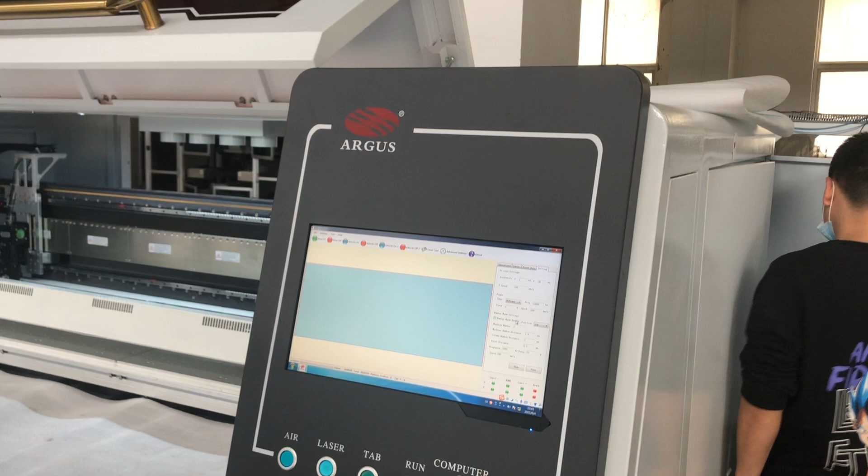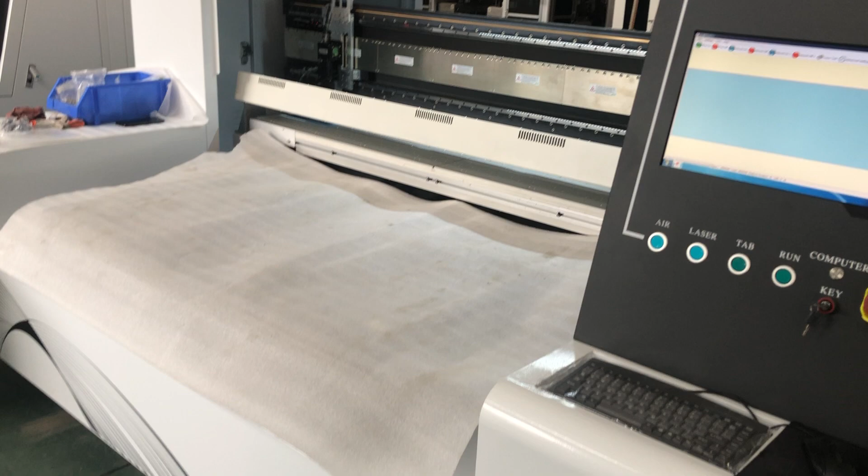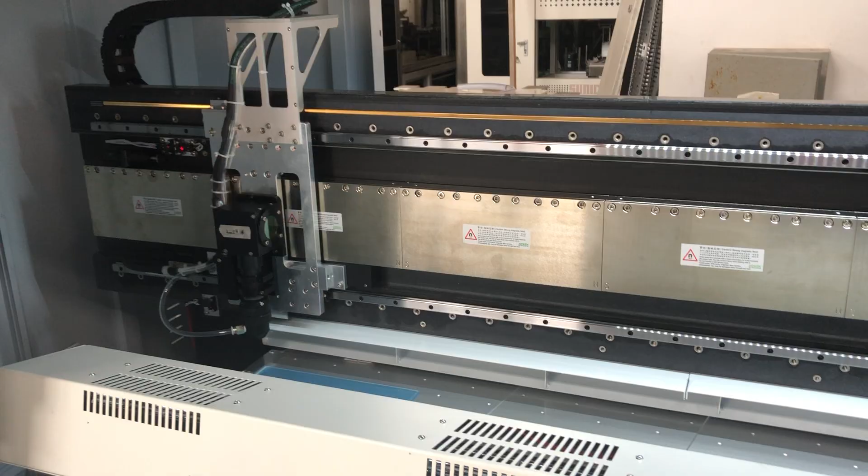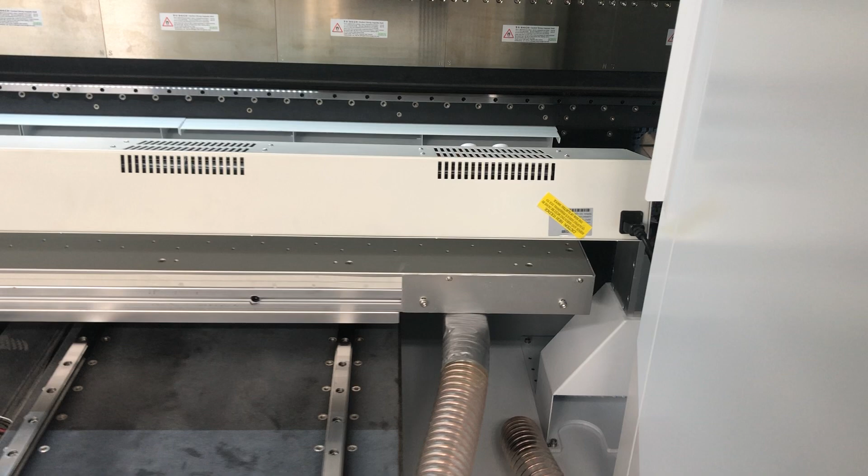Right now, we are just showing you our TV LGP laser dotting machine. This model is 1.2 meters by 1.9 meters. The host machine comes with the linear motor. And this one is the blowing system with the electric, so in case dust remains on the sheet when you do the dotting. In front, you can see it's connecting with the exhausting system.

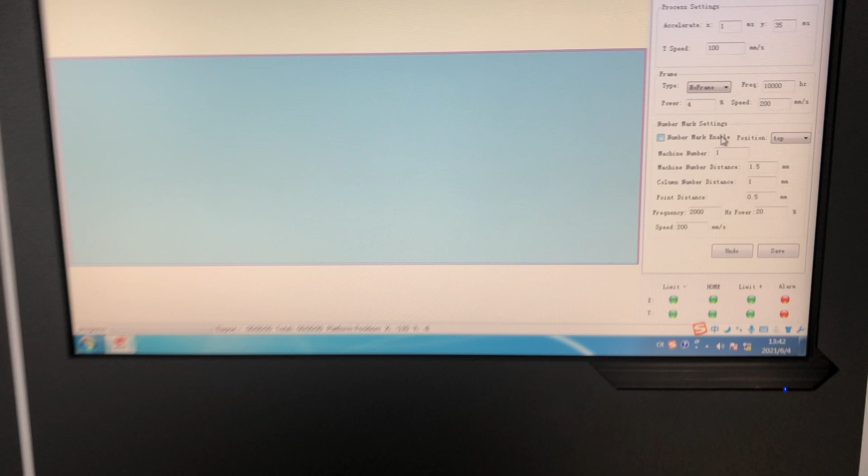Okay, now today we are going to introduce the software interface. Right now you can see here is our Sign Laser Point software. It is specialized for the LGP dotting.

On the top side you can see here, this is mainly the function items for the mechanical part. For example, blow on/blow off is used to control the blowing system, and adsorb on/adsorb off is used to control the work table, so you can have absorption power. So when you put on the sheet, it can be fixed on the work table and not moving.

This is laser testing advanced setting. Advanced setting is for the professional engineer to do the original system settings, so usually you will not need to use that.

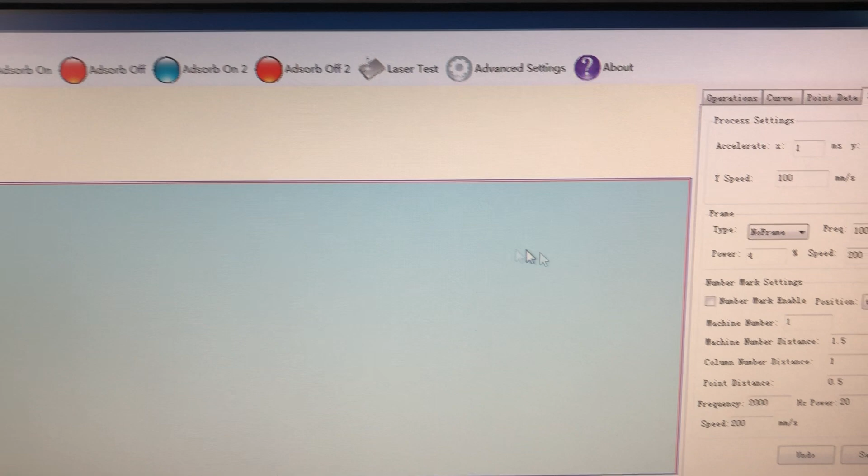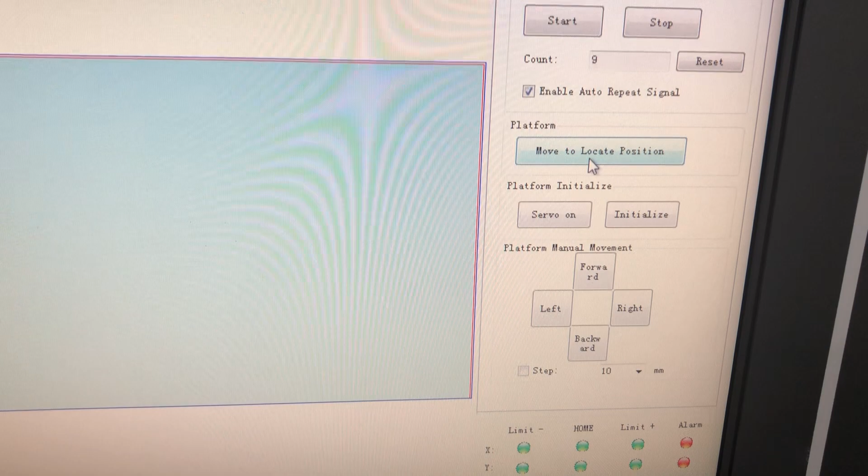For normal working, we will just concentrate here. You can see you have three operations: curve, point data - mainly concentrating in these three places. The operation is used to control the process, for example process start, stop, platform - just the work table. Move to location, locate position means when you click it, it will go to the original point.

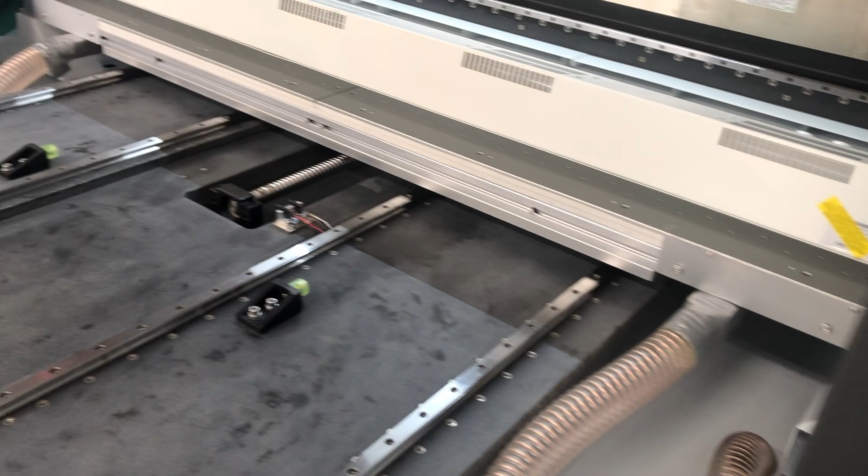Okay, the servo on initialize is used to give power to the work table. Forward, back, down, left, right - used to control the work table, go inside and come out, and also control the laser head left and right.

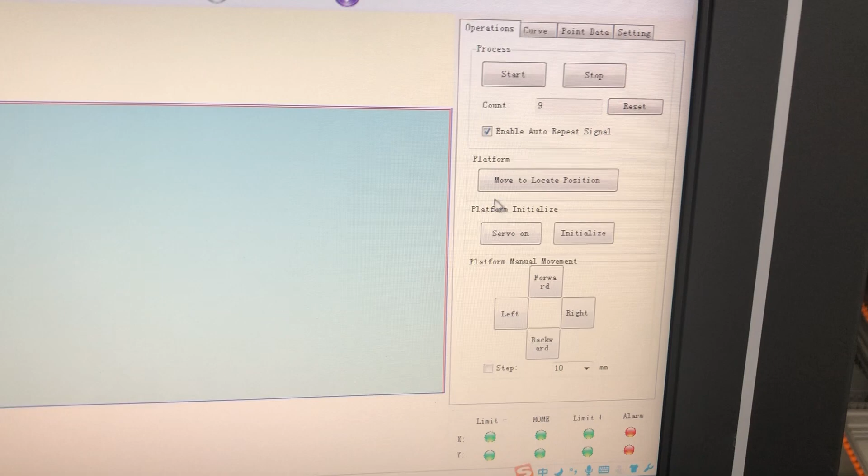There you have some signal lines to show you the status. This first page is used to control the laser dotting machine. And for the second page, the curve.

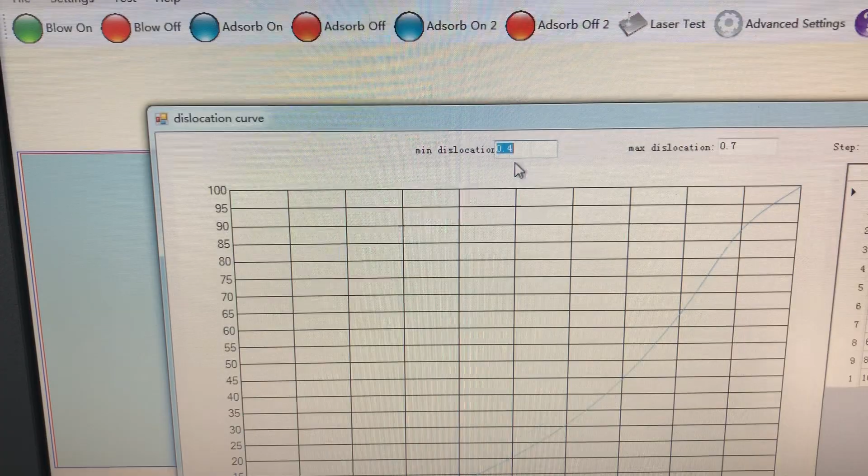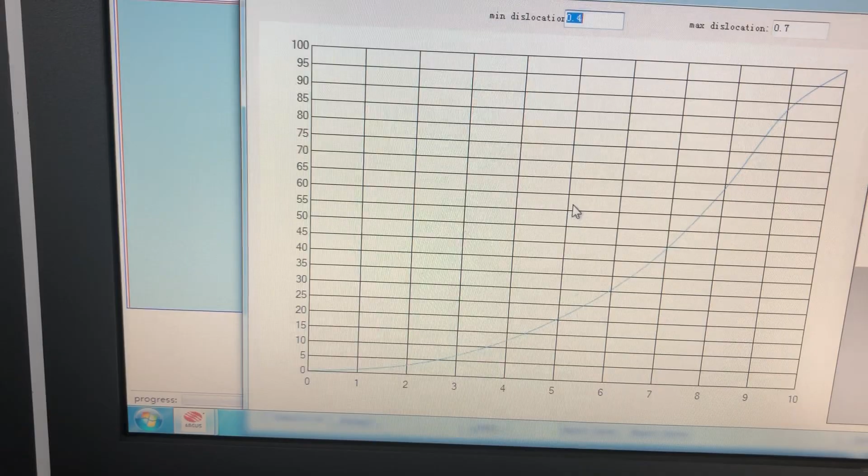Here you will see there's a dislocation curve edit. It's used to control and set the second line's dots, the dislocation place compared with the first line. So we can set here the minimum dislocation, maximum dislocation. This dislocation curve is usually to make the dotting patterns more beautiful, but it will not affect the result - it just affects the outlook of the LGP sheet.

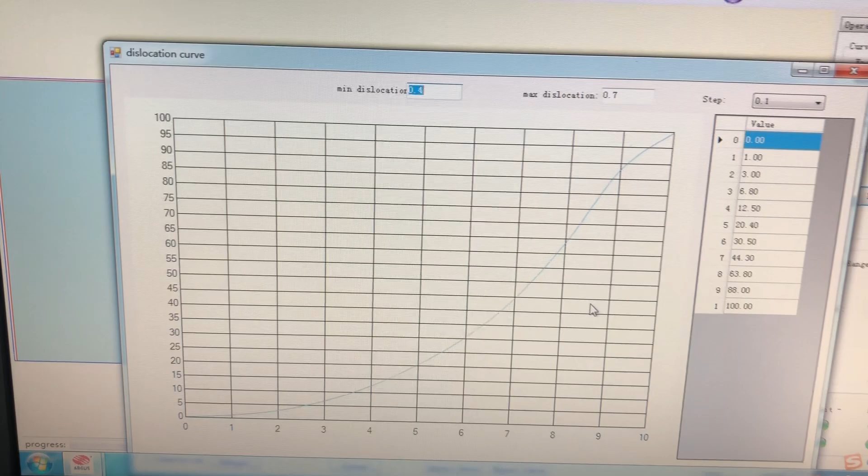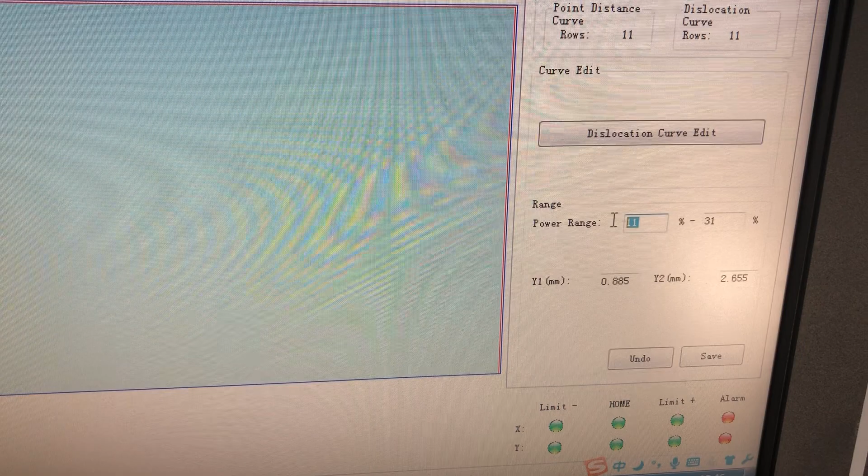Here we have the power range. We can set the minimum power, the maximum power. If you have more power, the dots will be bigger. If the power is small, the dots will be smaller. So more power means bigger dots, and then the density of the dots will be bigger. Low power, smaller dots, the density will be smaller. So we can use the power to control the density.

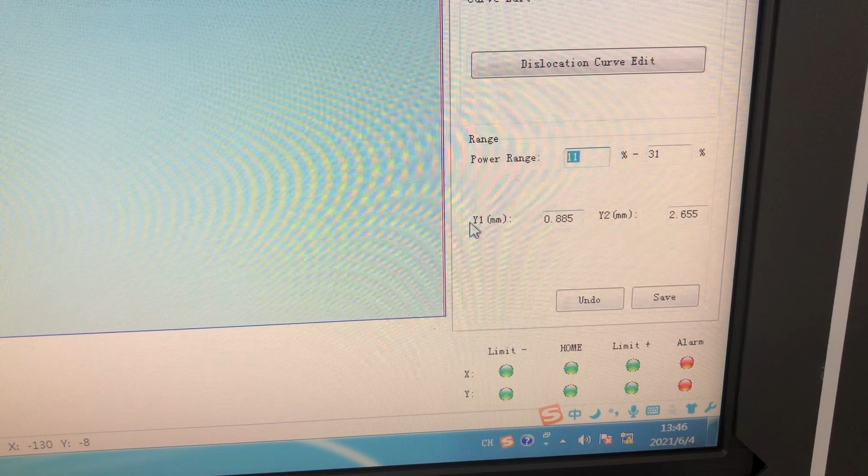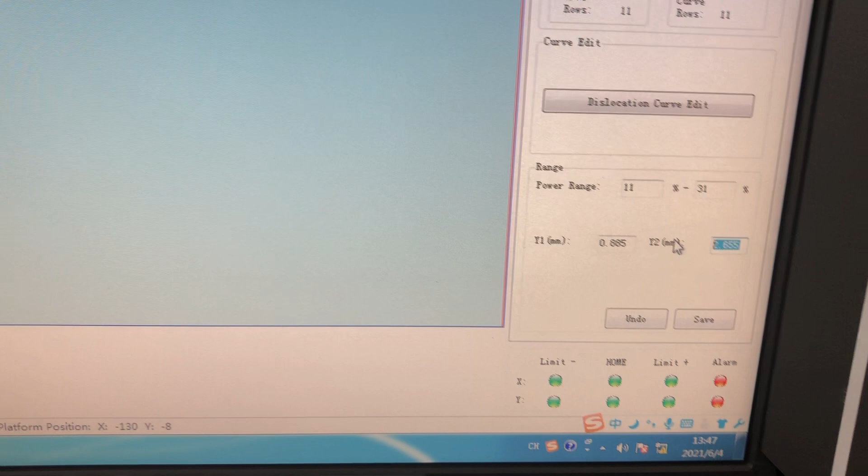And here in this place, the Y1, Y2 controls the Y-axis, the dots' distance changing. For all of the power range and the distance, we have a formula. Different kinds of LGP, like one-side-in LGP, two-side-in LGP, four-side-in LGP, they have different formulas. When you receive the machine, we will give you the formula and tell you how to set it.

So in this page, we mainly control the dislocation curve, power range, and Y-axis distance.

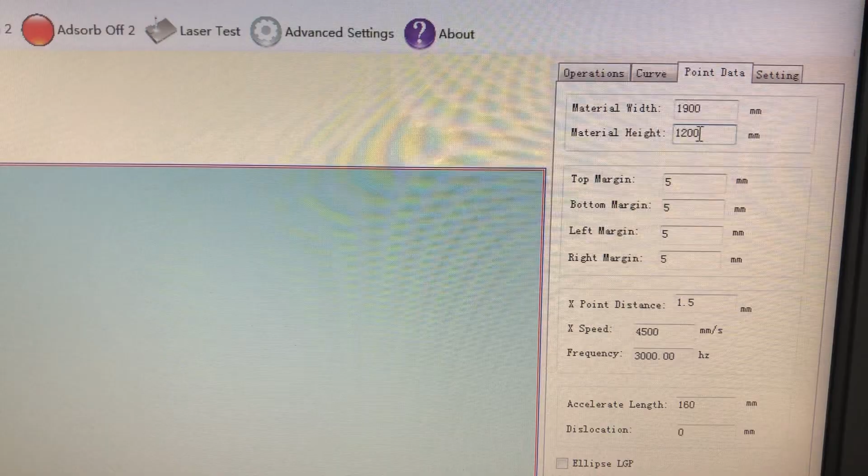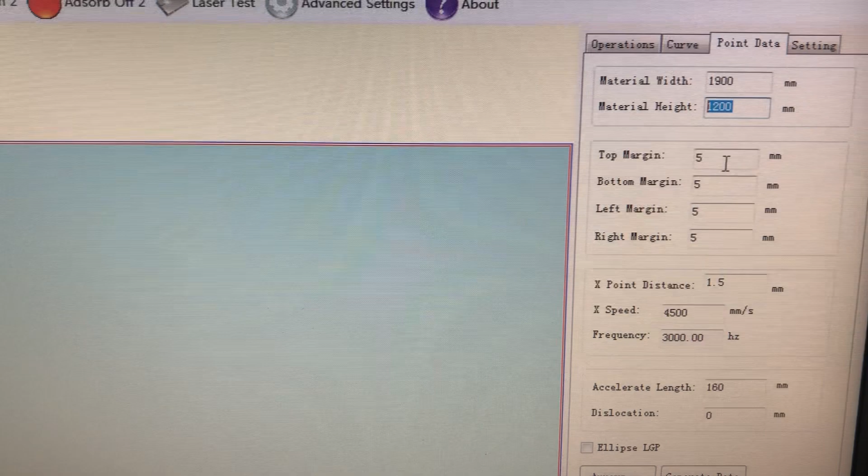The third page - here you can see material width and material height. This is used to change your LGP design size. We can type the size here directly; this is the maximum working area. So if your size is 600 by 600, you can change the numbers to 600 by 600 directly. Top margin, bottom margin, left margin, right margin - it depends on you. If you want some space on the edge, you can set the distance. Some customers set it at 5, some at 3, so it all depends on you.

Here the X point distance, this changes - you can set it to change the X-axis, the dots' distance. The smaller the number, the higher the density. So we can test with it.

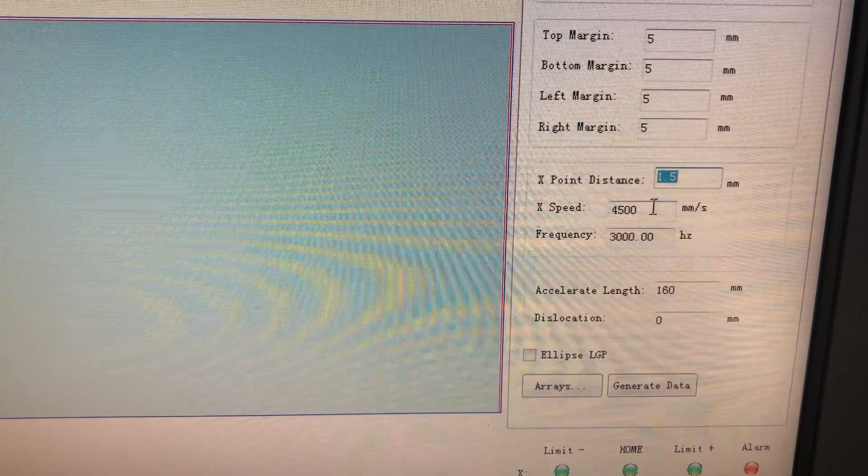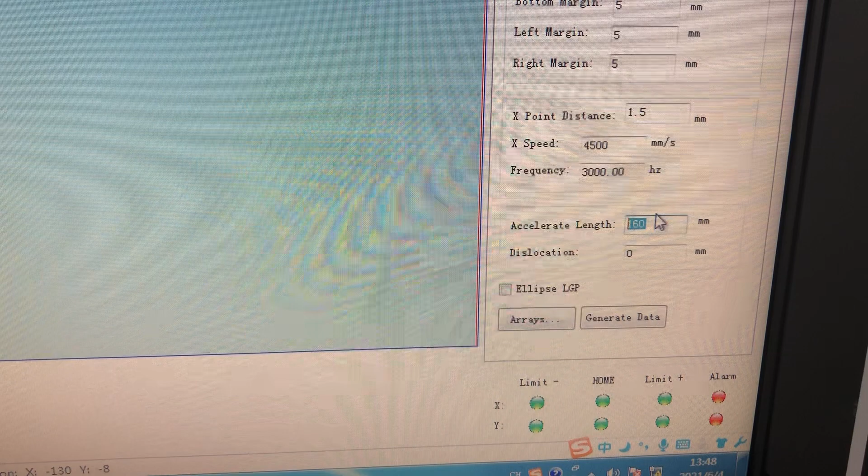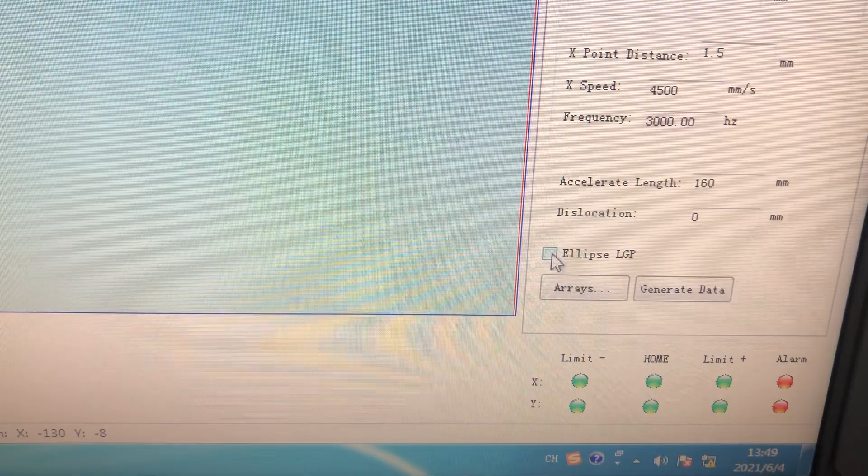Here at the Ellipse LGP, if you choose this one, you can create the circle LGP, but most of the time we'll use it for the square LGP. The Arrays here, we can choose these rows and columns, you can see here. With these functions, we can put several pieces of the LGP on the work table.

And we can change the line. For example, on the rows, if you want to have 3 pieces on the work table, you can just change it to 3. The columns is the same. Row distance means, for example, if your LGP size is 600 by 600, the second piece's row distance will be 600.

So it depends on your sheet size. This is a change for the array settings. Another thing is for the curve edit. You can see curve edit here. We have this power curve lines.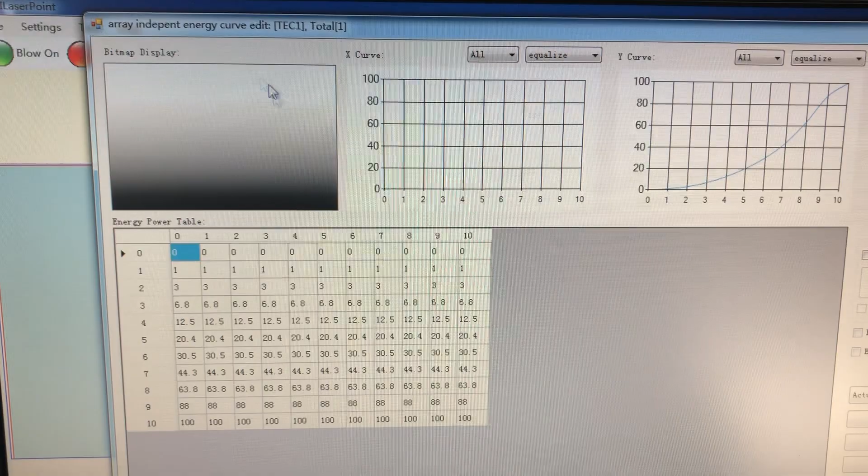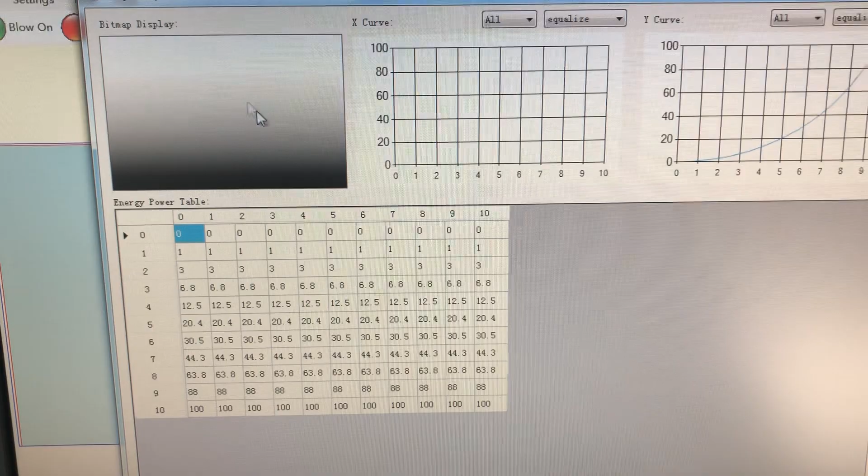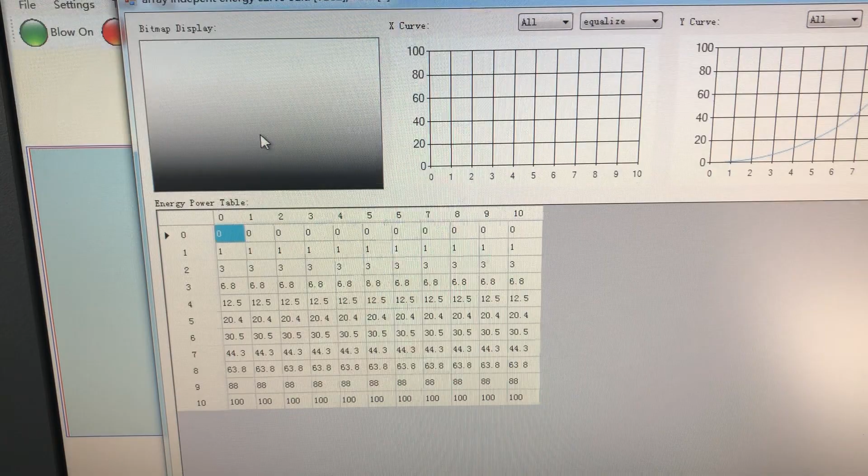We will show here the bitmap file display, showing gray levels. In this picture is typically one side lighting LGP. The place that is more dark, the laser energy will be higher, and then the density will be higher also. In the white place, the laser power is lower, and the density will be lower.

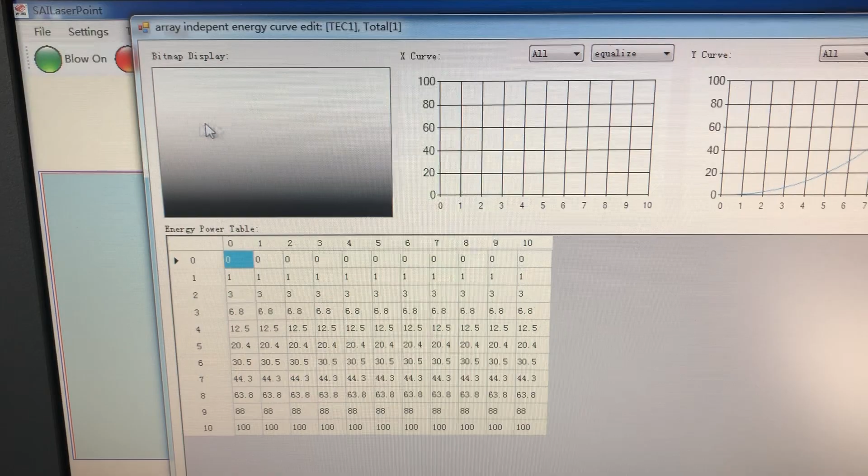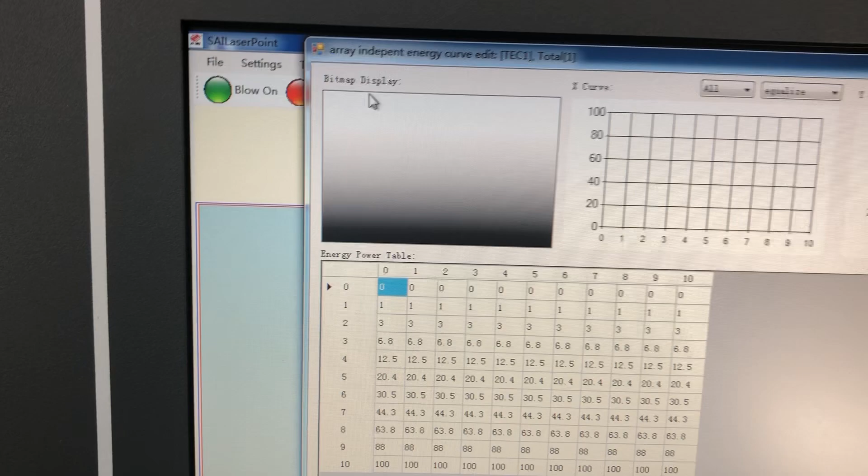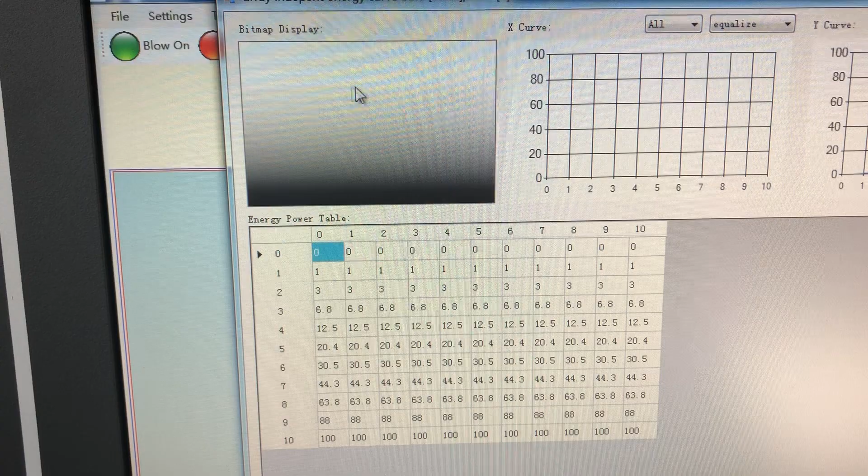So in this picture, the light should go through the top side, from top side to the bottom side. Because if we want to get a very uniform LGP, the place which is close to the LED strip should have low density, and the place which is far away from the LED strip should have high density, so that the far place can be more bright, and in the place close to the LED strip you can let more light pass through.

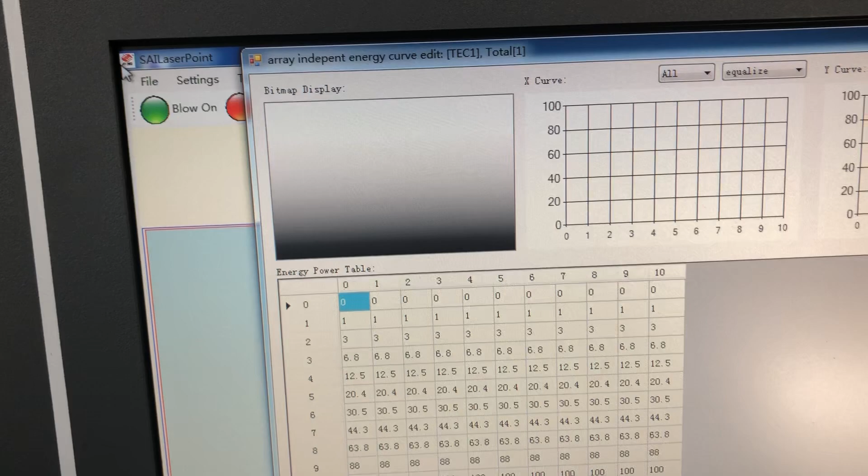If the density is too high here, the light will stop here and will not pass through to the next place, so it will be very dark. So for LGP adjusting, we need to find the balance. It's not like if we make the density as high as we can, the LGP will be better. We have to find a balanced way so that this place is not too high and not too low, to make sure the light can pass through this area to the edge.

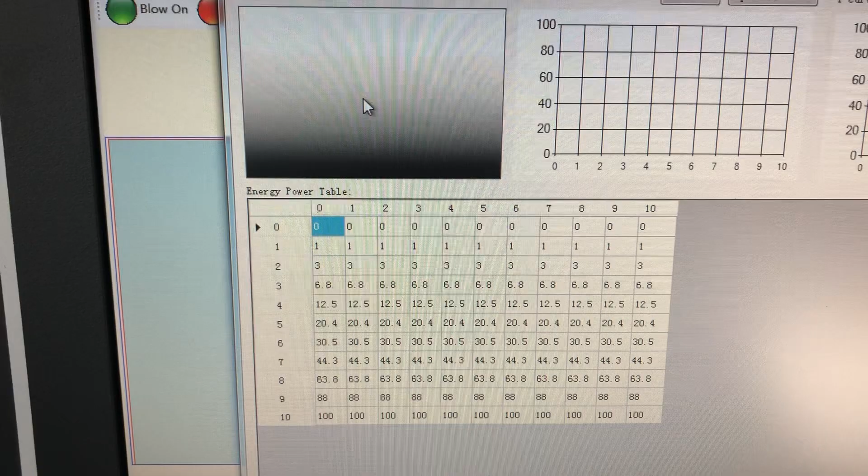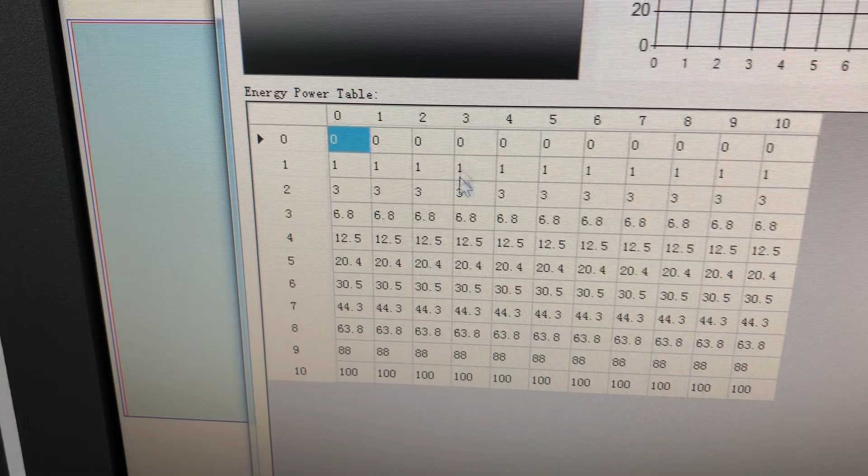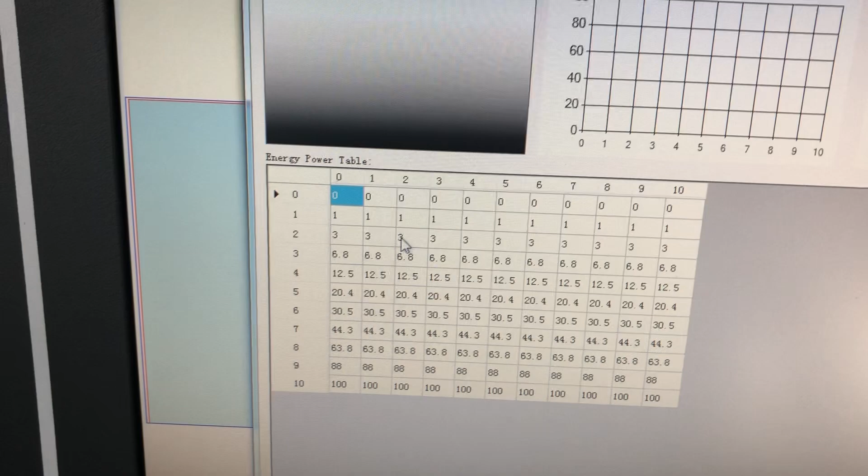That's all, so we need to do different tests to find the best uniformity result, then we keep it. Here you see the energy power tables. All of these lamps you can adjust. Each lamp represents the power percentage of the laser. So if you find some place is very dark or has no energy, you can raise that place's power energy to increase the dot size. Then the density will be higher, and the brightness will be higher also.

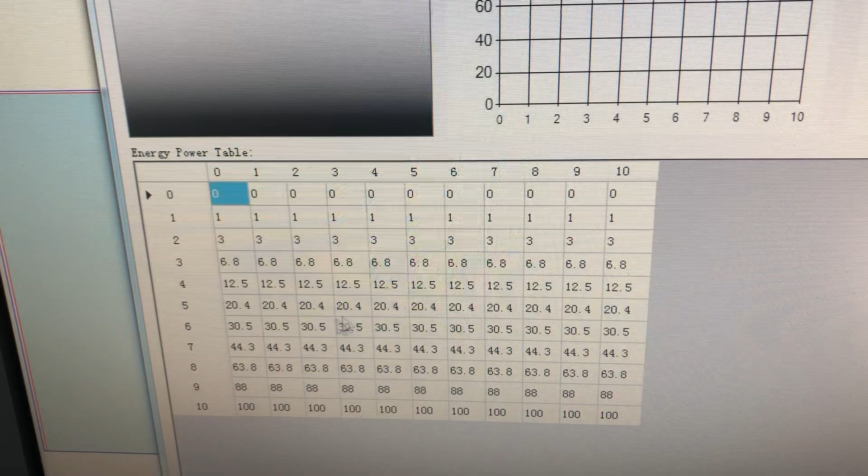For this power curve changing, you can change it in the table directly, and you can also adjust it in the curve directly. Okay, so this is the one side lighting tables.

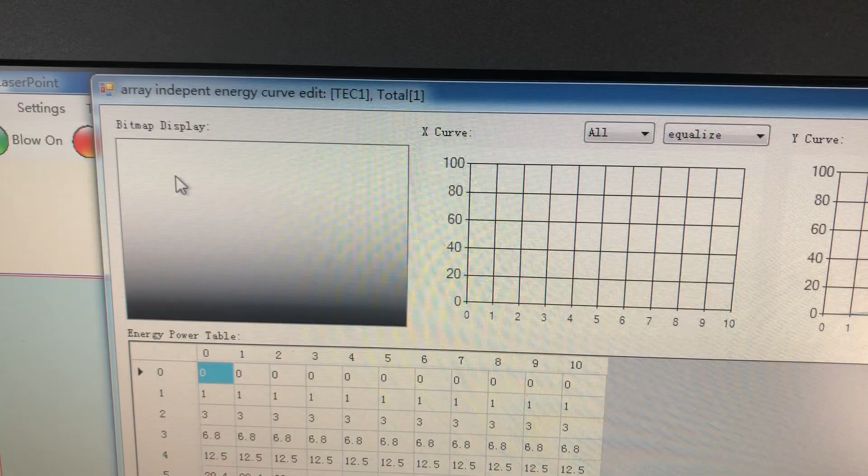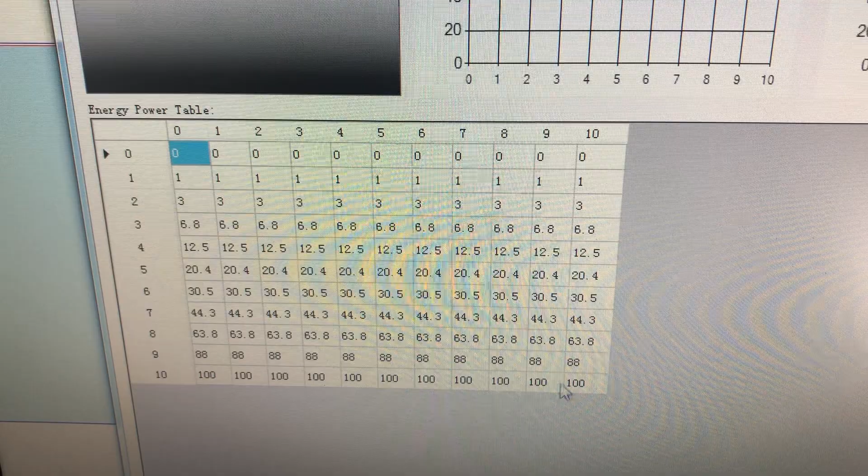If you use two side lighting, the center side will be dark, no sorry, the other two sides will be white. And you will find that from here, the 100 will change to 0, begins from 0, and in the center will be 100. So that's the different curve, and that's how we adjust the uniformity.

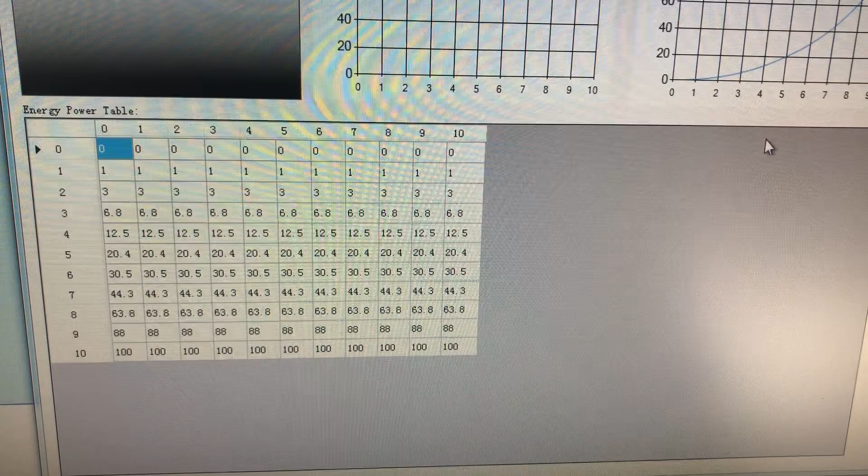Once you finish that, you can save the file and quit, and then generate data. Then we'll create the LGP file here. The fourth page is usually for the system settings, which has no relationship with the LGP quality, so you just need to use it based on our guide.

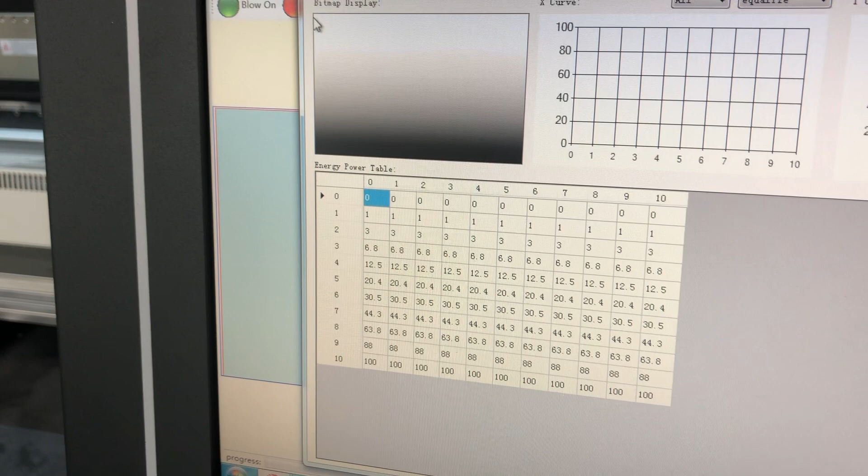That's the whole functions of the software. According to the explanation, the things which can affect the light uniformity: firstly is the power range. This 11% represents, for example, just now the curve place here, so in this place, minimum power. In this place, 0 means 11% power, 100 means 31% power. This will affect the uniformity, and we need to adjust it.

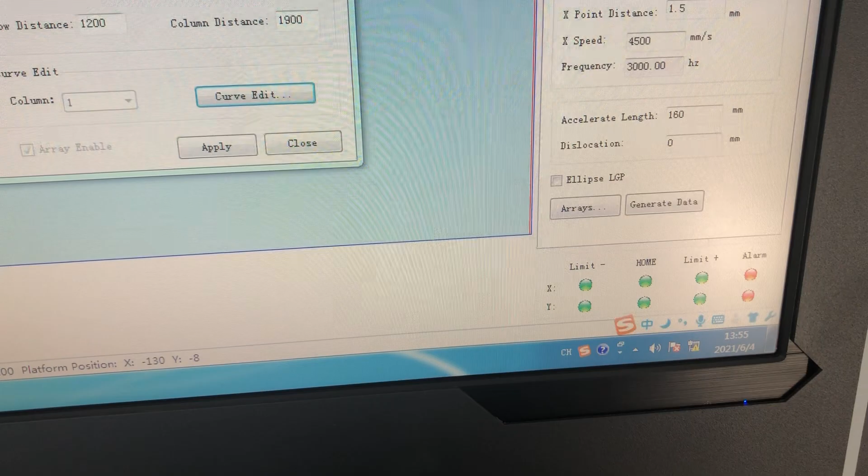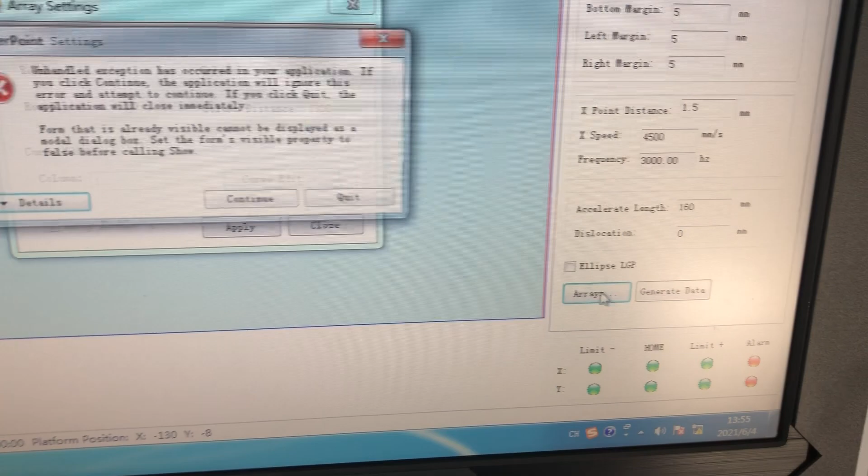And the distance will affect the result also, the density. If your sheet size is very big, then we can change a little bigger for the density. And the third place to change the uniformity is the curve editing. That's the most important part.

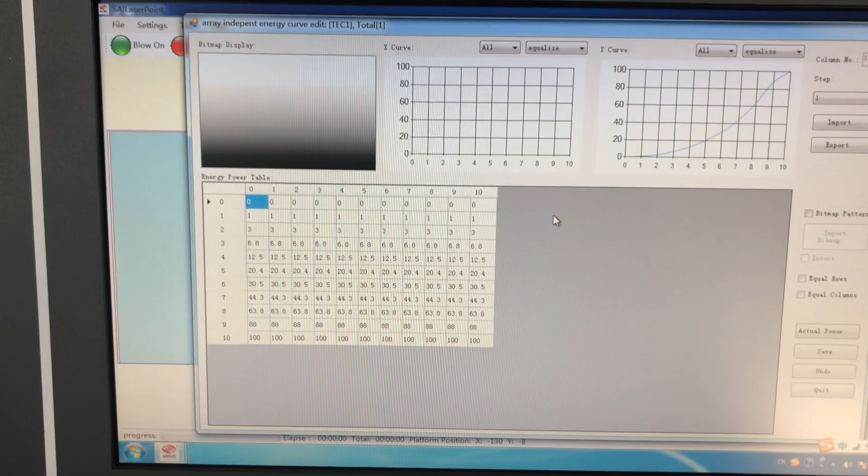And of course, we have some reference formula for it, and we will give it as reference. If you want to get extremely high uniformity, like 90% and up, you need to do several testing to find the best power range, best distance, and also the best power curve. Then you will get a different result.